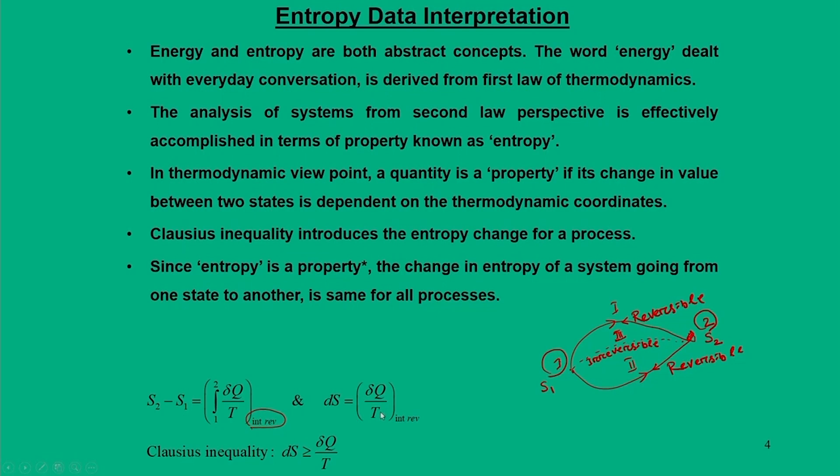Now, moving further, there is another viewpoint of this entropy analysis. In chemical engineering, they look at entropy evaluation in a different viewpoint, because when we have chemical reactions, it is always necessary to work with the absolute entropy.

So, to get S1 or S2, we need to find out the entropy value at, let us say, state 1, as the addition of two parameters: one is reference entropy at a given pressure and temperature or given thermodynamic conditions, plus the entropy transfer dq by T.

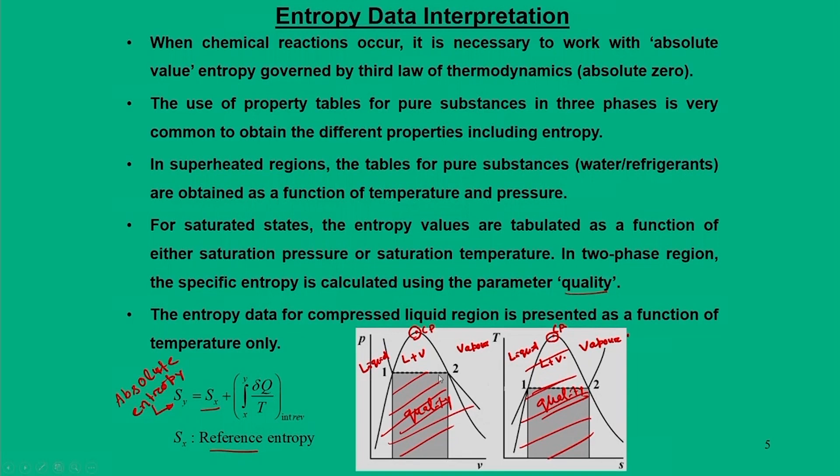So we call this either quality of steam or quality of any substance, maybe any refrigerant. For these things, the entropy data can be evaluated based on the thermodynamic coordinates.

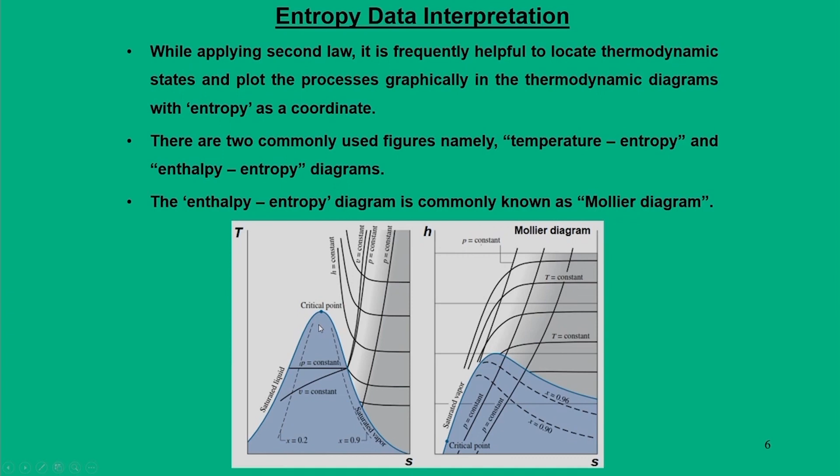The entire idea of showing this is that while evaluating the data for entropy, one can use these graphical representations to calculate entropy as a thermodynamic property.

Moreover, there are other equations that we call entropy equations, and these entropy equations can be effectively used. In fact, all the property data were derived from these entropy equations, and if we can effectively utilize them, we can find out various relations.

And in particular, for entropy calculations, the ideal choice is the temperature-entropy equations, and normally that equation we call the TdS equation.

So let us talk about what this TdS equation is all about and how it is derived for various pure substances. Let us recall that for a pure and simple compressible substance, we can write down the first law of thermodynamics.

This involves Q, that is nothing but TdS in terms of entropy. We have dU, that is the change in internal energy, and we have PdV, that is flow work or work transfer.

Similarly, if you write this internal energy as a function of enthalpy, then the second TDS equation is derived in the form TdS equals dH minus VdP. So these two are the fundamental TDS equations which are useful for evaluation of entropy.

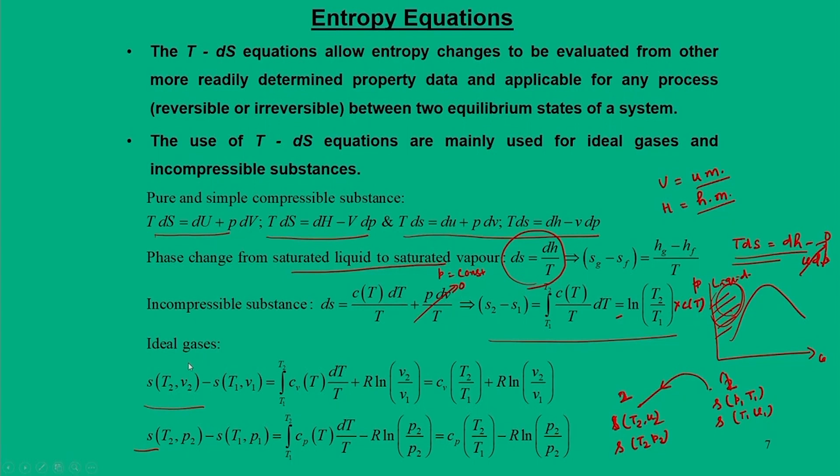Now for this we say its property or entropy we define as S at T2, V2, or S at T2, P2, that is point 2, and for point 1 we say S at P1, T1 and S at T1, V1. So a system goes from 1 to 2, the change of entropy is written by these two entropy equations, and this is again derived from the two fundamental TdS equations. So this is all about how you are going to evaluate entropy.

Now, let us see how we are going to frame an entropy balance for a closed system. By closed system I mean a system we consider as closed because it contains the same matter and there is no transfer of matter across the system boundary, but energy interaction is possible. So there is no mass transfer, but energy interaction is possible.

Now for such systems we are going to find out the entropy balance equation. For that we have the fundamental expression called the Clausius inequality. In fact, prior to this we have analyzed the Kelvin-Planck statement and the Clausius statement. So based on their analysis, we can consider a closed system.

This closed system is executed by two cycles, one through an irreversible process, the other through a reversible process. So what we see here is that a system undergoes a change of state from 1 to 2 first in an irreversible process, but it returns to point 1 again through a reversible process. So in this way it completes a closed cycle.

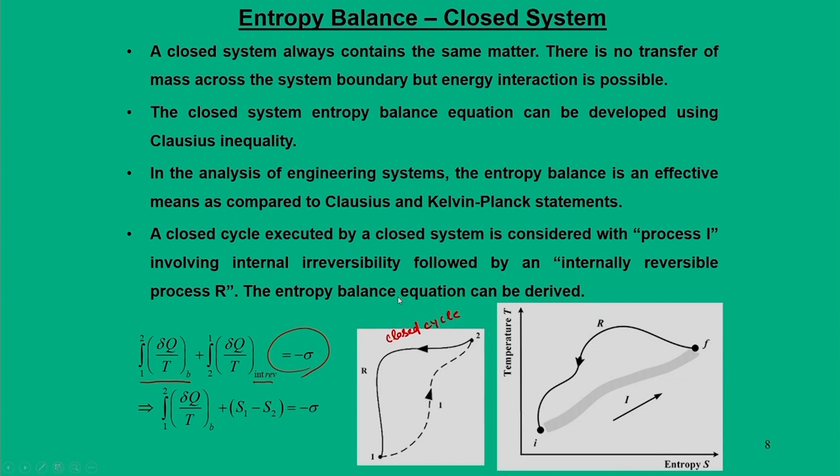Now let us evaluate that particular equation in a more elaborate way. Here we have shown from initial state to final state, it goes from an irreversible path and returns to a reversible path. We write this entropy balance equation as S2 minus S1 is equal to delta Q by T with this boundary plus entropy production, sigma. This is the fundamental equation of what we call the entropy balance equation for closed systems.

Now if you look at these two terms, what it says is that the change in the amount of entropy contained within the system during some time interval is equal to the sum of the net amount of entropy transferred across the system boundary in the same time interval and the amount of entropy produced within the system in the same time interval.

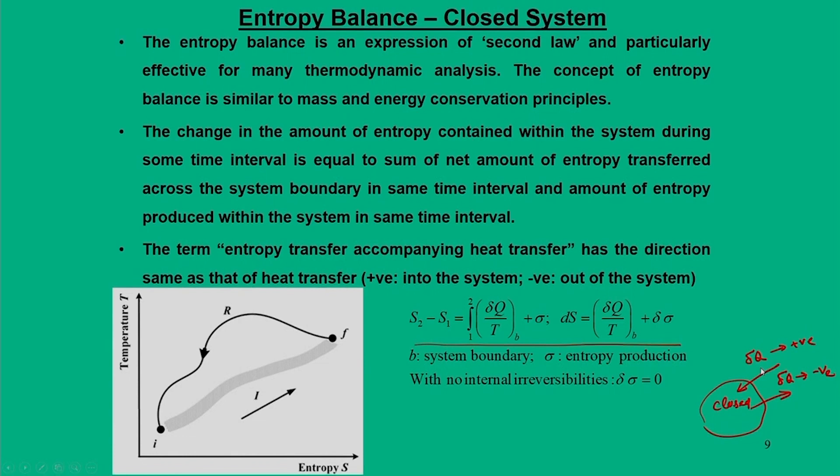Mathematically, when we write these equations, there is a positive or negative sign. The value of entropy, whether positive, goes into the system. In a closed system, we say dq when heat is added into the system, dq is positive, and when heat is taken out from the system, dq is negative. So the change in entropy is governed by this, depending on whether heat is added into or taken out from the system.

Now we will look into another viewpoint for the same equation. So we derived this equation as S2 minus S1 equals the integral of dq by T from 1 to 2, for one parameter dq by T, plus there is another parameter sigma. Let us talk about the significance of sigma. What is this sigma? Sigma is nothing but what we call entropy production.

So what does this mean? If a process becomes irreversible, then entropy is produced within the system, and it cannot be a negative quantity. That is the most important inference from these entropy equations. So for an irreversible process, there is entropy production and it is always greater than 0, and there is a possibility that entropy production can be equal to 0 if the system undergoes a reversible process.

Now based on this, the change of entropy from state 1 to 2 either can be equal to 0 or has to be greater than 0. There is also a possibility it can be less than 0.

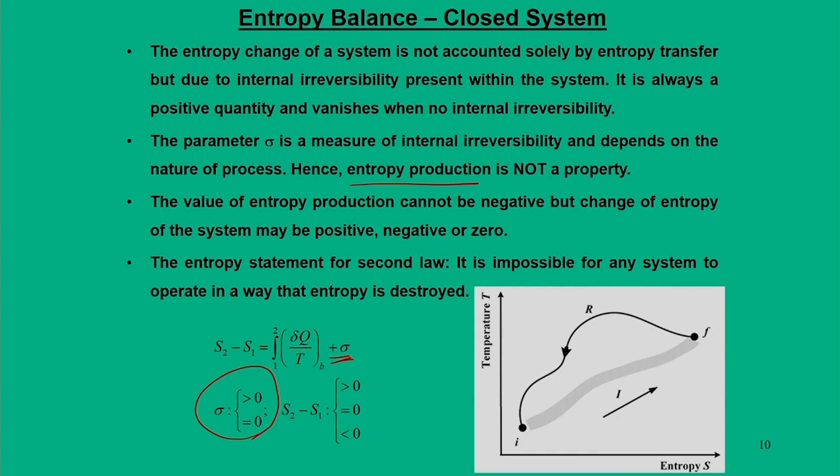Now let us evaluate this entropy balance equation with another viewpoint, in terms of solving problems. One thing is that when we say production, let us bring the time scale into consideration. What is this time scale? Now, if it is a closed system, and this closed system has a boundary, across which dq can enter, and dq can be positive or negative.

So based on this, we have this entropy balance equation. Now if this particular closed system which has a boundary, and this boundary is at constant temperature Tb, these equations can be rewritten in this manner, because since the temperature is constant, we can bring it outside the integral. So at constant temperature Tb, these entropy equations can now be written as S2 minus S1 equals Q by Tb.

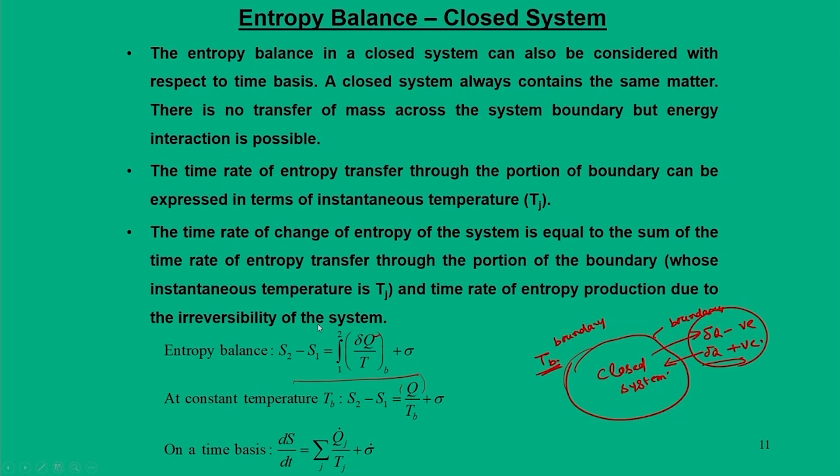Having established this entropy balance, we are now able to think about extended or enlarged systems. What does this mean? We already say that we have some system, and out of which is not included in the system, we say its surroundings. There is always heat interaction between the system and surroundings.

What I am looking at is that let us bring the entire system and surroundings into one closed loop or closed platform, and we call this an isolated system. Now, when I say isolated systems, it involves the system plus surroundings. So for that, the energy balance equation for an isolated system is equal to 0 — the total change of energy of system and surrounding is 0.

Similarly, we can write the entropy balance equation in a different way: delta S of isolated systems is equal to delta Q by T plus sigma isolated, and this sigma isolated is nothing but entropy production.

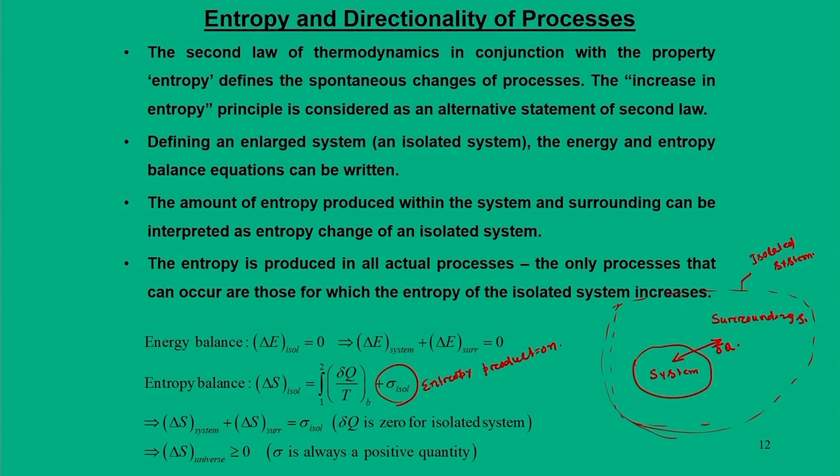So we say that entropy is always produced by all actual processes, and for which the entropy of the universe is always greater than or equal to 0, or in other words, entropy of an isolated system increases. In this case, the isolated system is nothing but the universe.

Now let us move to entropy balance equations for the control volume. The basic difference between a closed system and a control volume is that in a control volume, both mass and energy interaction are possible. So what we have is that a control volume is typically represented with multiple inlets or multiple outlets, as you can see here.

We may have something entering into the system and something leaving out of the system. The entering mass we call M1 and M2, and the mass that comes out we call M3 and M4, and we call this a control volume. Apart from this, there is energy and heat interaction Q from this control volume to the surroundings.

All these things are possible, and for these, if you want to write the entropy balance equation, it says that the time rate of change of entropy within the control volume is the sum of 3 terms. First is entropy transfer accompanying mass flow rate into and out of the system. Second is the rate of entropy transfer at the location of the boundary, which is located at instantaneous temperature Tj — that heat entropy transfer is due to heat transfer. Third involves entropy production within the control volume due to irreversibility.

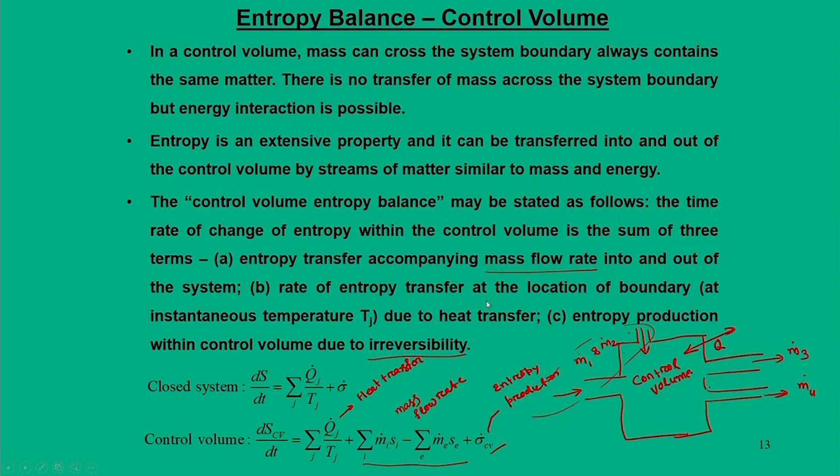And this production is mainly due to irreversibility. Now, let us move more closely, and this particular slide shows the elaborate version of this differential form of equations for the control volume, and the simplified sense that this particular equation gets simplified for a steady state entropy rate balance.

So what this means is that for a steady state entropy balance, we say dSCV by dt is equal to 0. So based on this, the entropy balance equation reduces to this form.

Now again, when I say that there is no heat transfer, that means we say Qj goes to 0, this entire equation reduces to S2 minus S1 is equal to sigma dot Cv by m dot.

Here we have assumed that mass flow rate inlet and mass flow rate exit are the same. Further simplifications can be also done for single inlet and single exit control volume at steady state. So, in fact, all these equations are relevant or will be required when you solve the problems.

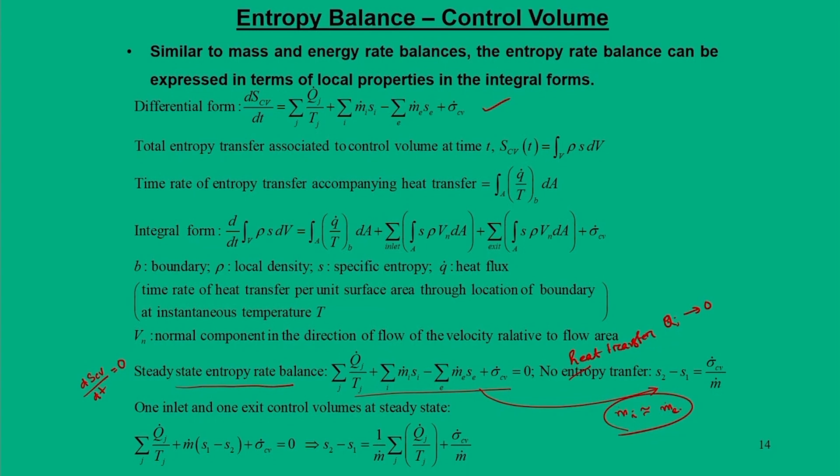Now, the other aspect of entropy balance for the control volume is to elaborate the expressions of work transfer and heat transfer for internal reversible processes. And when you say internal reversible processes, it means the internal irreversibilities are absent.

So, for an internal reversible process, these entropy equations we can say S2 minus S1 is equal to 0. So we start with the first basic expression Q Cv by m dot is equal to T into S2 minus S1, and this particular term Q dot Cv by m dot is nothing but TdS.

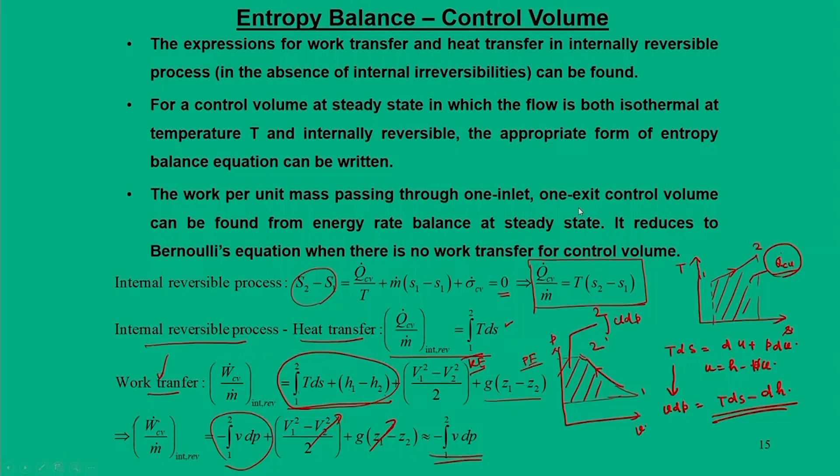So this is the significance of the entropy balance equation for control volume, how you can represent them in thermodynamic diagrams.

So the last segment of our discussion is about isentropic processes. The word isentropic process means it is a constant entropy process. That means the system undergoes a change of state from 1 to 2 without involving change of entropy, and such a process in a TS diagram and HS diagram is represented here. So these two are for pure substances.

And it is governed by which region the initial state is in, whether it is liquid state or maybe a mixture of liquid and vapor state. For example, state 1 here is shown as only vapor state, even state 2 is also a vapor state, but state 3 is in the liquid plus vapor state, but all of them have the same entropy.

So, in fact, here also all of them have the same entropy. So it is an ideal choice that in a temperature entropy diagram or enthalpy entropy diagram, the vertical line indicates the entropy axis at constant entropy.

Now, for other situations we can refer to the thermodynamic property tables, for ideal gas, or thermodynamic properties referred for pure substances.

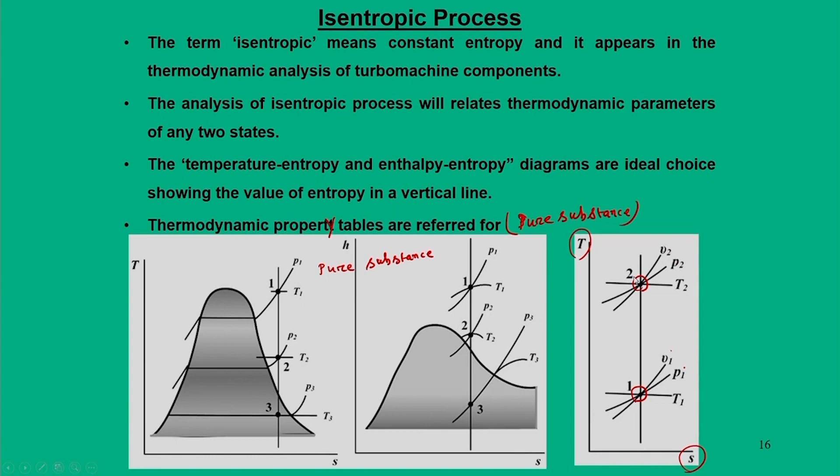Within this process from 1 to 2 we can draw a constant volume line, constant pressure line, and constant temperature line. The constant temperature line is a horizontal straight line. Similarly, for state point 2 we will have constant volume and constant pressure lines. But one thing is that this vertical line represents the constant entropy line.

Here, in more elaborate expressions, the isentropic process is shown from the classical viewpoint of thermodynamics, where we find the entropy equations. These entropy equations we can start with for ideal gas situations. For an ideal gas with constant specific heat, for an isentropic process, we can write down two fundamental equations, the fundamental expressions for entropy equations.

From these equations we can recall the expressions for specific heat as a function of k and R. Here k is the specific heat ratio, which is Cp by Cv, and R is Cp minus Cv.

By putting these equations into the entropy equations, we are able to derive the isentropic relations: T2 by T1 is equal to P2 by P1 to the power k minus 1 by k, which is equal to V1 by V2 to the power k minus 1.

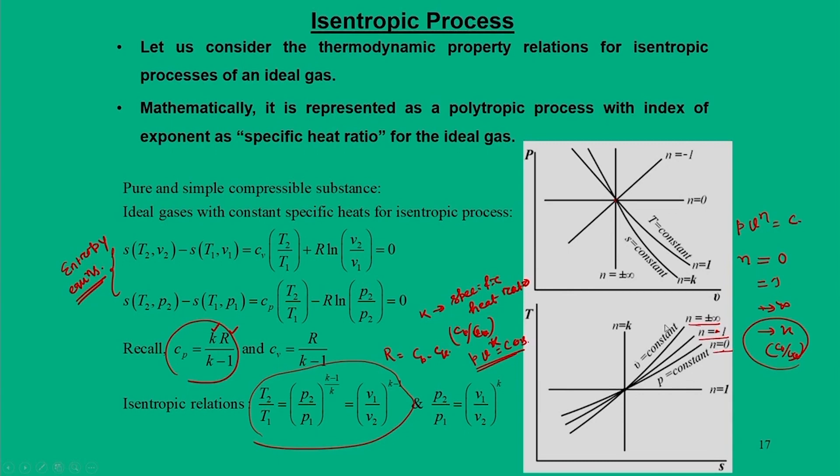From these equations we say Pv to the power n is equal to constant, where n can be 0, n can be 1, n goes to infinity, or n can go to k. k is nothing but Cp by Cv. So this is nothing but the isentropic equation, which we use in a classical way.

With this we come to the end of the entropy analysis. So before we close these lectures, let us solve some simple problems. This first problem is about...

entropy production for a closed system. What it says is that we have saturated water at 150 degrees centigrade, which is contained in an insulated piston-cylinder container assembly. This change of state of the water goes from the saturated liquid state to the saturated vapor state.

This change of state is achieved through a paddle wheel arrangement. Schematically we can draw a piston-cylinder assembly which is coupled with a paddle wheel arrangement. So basically we are stirring this water. As a result, we are introducing entropy into the system, and through this, some work transfer is done into the system.

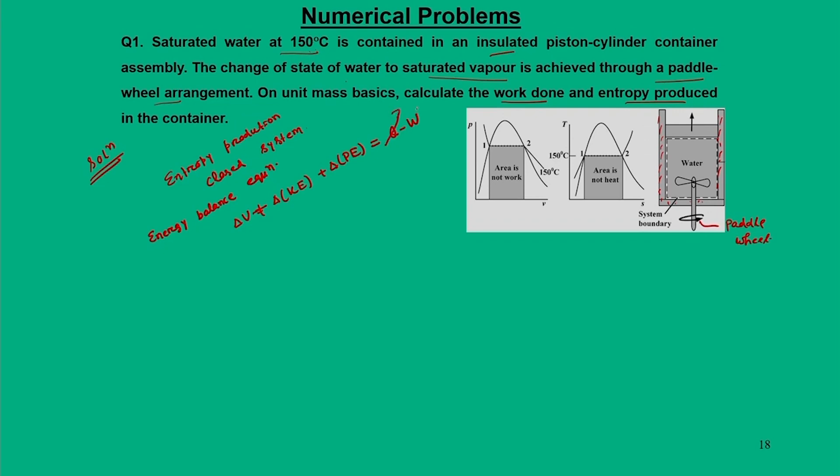Now, since it is an insulated container, delta Q is 0, but there is work transfer, and there is no kinetic energy, no potential energy. So the specific work can now be written as W by m equals U1 minus U2 — the first expression.

Similarly, we can get the second expression for entropy balance. We start with this expression: delta S is equal to the integral of delta Q by T from 1 to 2, plus sigma. Here there is no heat transfer into or out of the system, so that term goes to 0.

So we can write sigma by m, or we can say m into S2 minus S1 is equal to sigma, or sigma by m is equal to S2 minus S1.

Now our main intention is to calculate U1, U2, S2, and S1. For that we have to use steam table data.

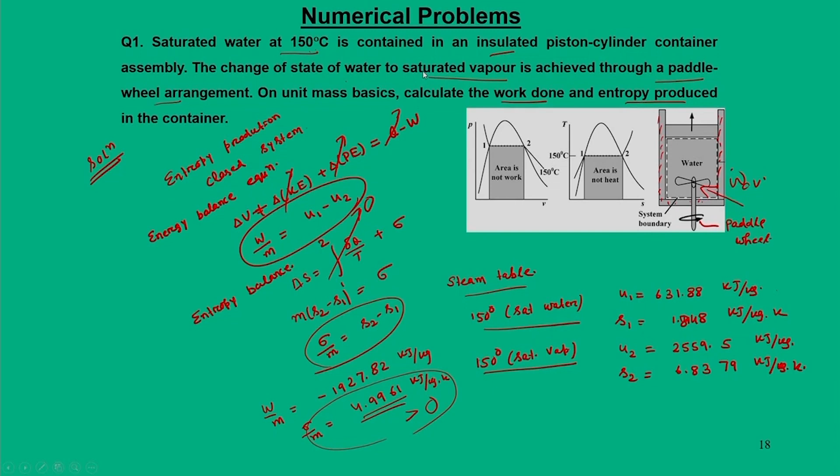So, this satisfies the fact that through a stirring wheel mechanism it is possible to change the state of water, which is initially saturated at 150 degree centigrade, and we can move to the saturated vapor through a paddle wheel arrangement.

Now, the next problem is about the entropy productions for a control volume. The data which is given is that air enters a device at temperature 21 degree centigrade, pressure 5 bar, and separate streams of air at 1 bar leave the device, one at temperature minus 18 degree centigrade, other at 79 degree centigrade.

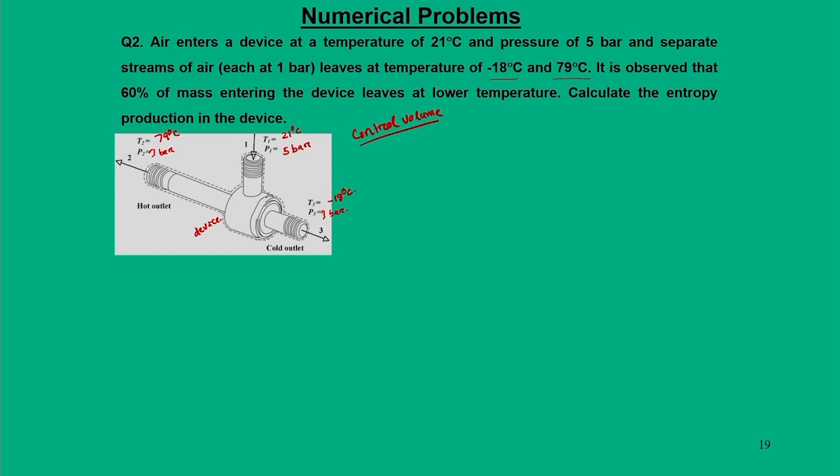So, schematically if you represent, this is your device, there is one inlet for which temperature enters at 21 degree centigrade, pressure at 5 bar, but the air leaves in both states 2 and 3 with pressure 1 bar, but temperatures are different: the hot outlet is at 79 degree centigrade and cold outlet is at minus 18 degree centigrade. So, since some mass is entering and leaving the system, we say it is a steady flow device, and we can make a system boundary as shown in the dotted lines.

So, the assumption that we are going to make is that there is no heat transfer and no work transfer through this control volume. So, two fundamental equations are required. One is mass balance, which is m1 dot is equal to m2 dot plus m3 dot.

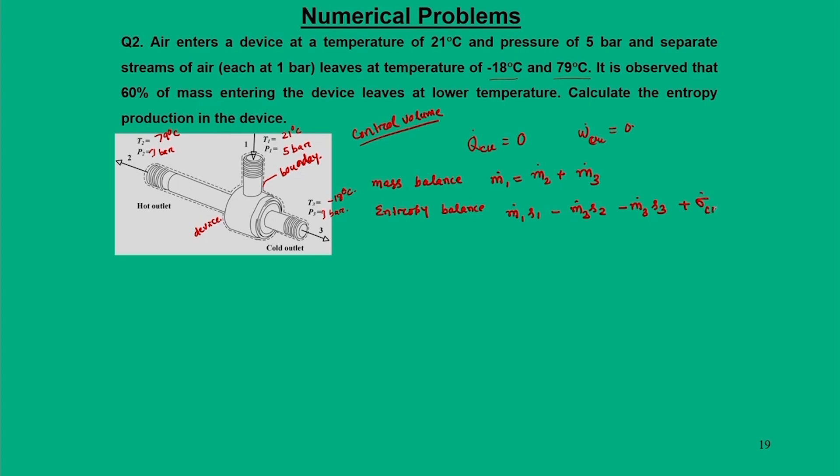And entropy balance equation can be written as m1 dot S1 minus m2 dot S2 minus m3 dot S3 plus sigma dot CV is equal to 0, because through the boundary work QCV is 0.

Now, also there is another data, it is observed that 60% of mass entering the device leaves at lower temperature. So, from this we can say M3 dot is equal to 0.6 of M1, and M2 dot is 0.4 of M1.

Now, when I put these equations here, they can be simplified as M2 dot (S1 minus S2) plus M3 dot (S1 minus S3) plus sigma dot CV is equal to 0.

By putting these two numbers, we finally get the expression sigma dot CV is equal to 0.4 M1 dot (S2 minus S1) plus 0.6 M1 dot (S3 minus S1), and we can bring this M1 dot here, so sigma dot CV by M1 dot now becomes...

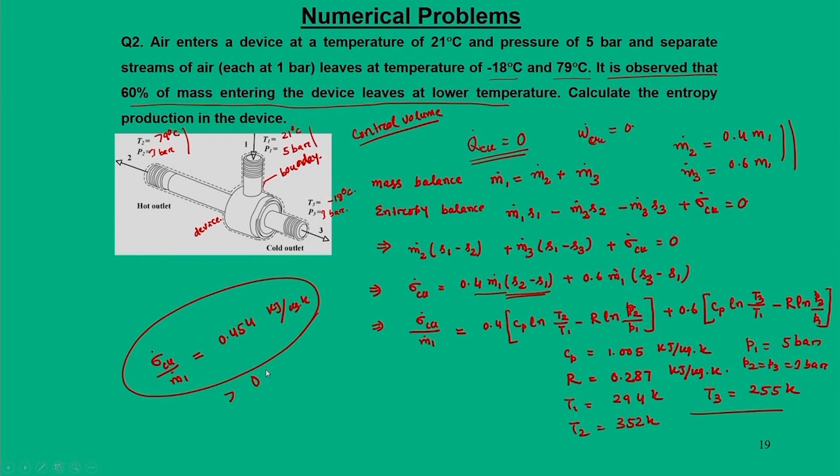So, we have solved two problems, one on entropy balance for closed systems, other is for control volume. So, with this we come to the end of entropy. Thank you for your attention.